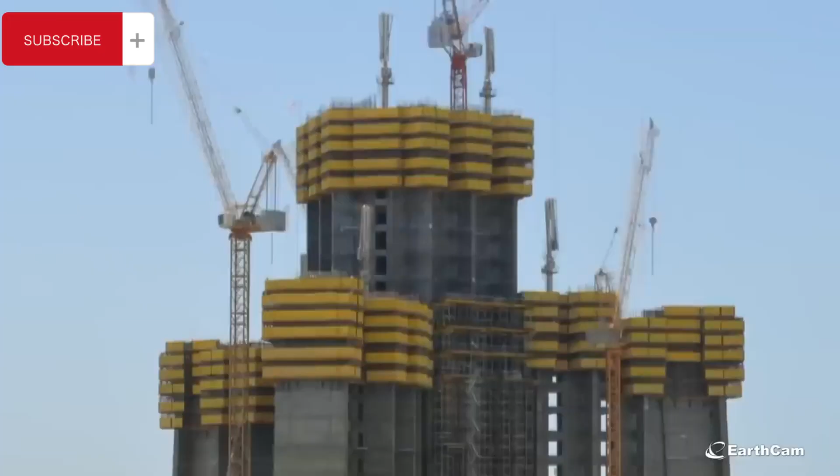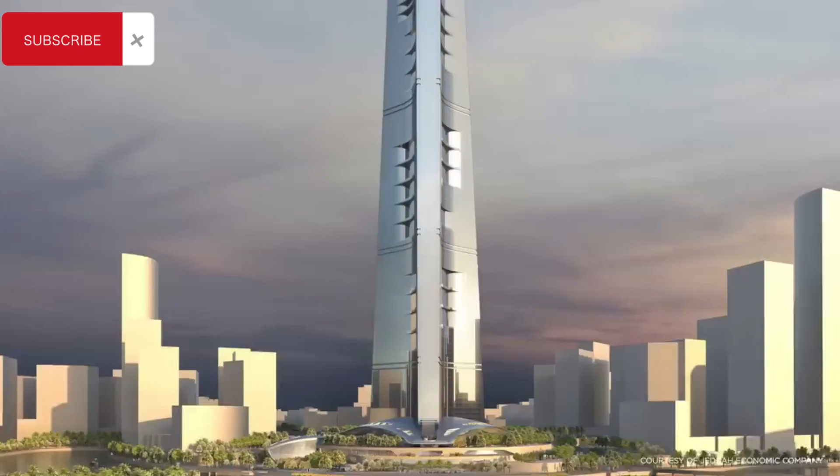Today the building stands unfinished and abandoned 300 metres in the air. And after years of political crackdowns and a global pandemic, it remains unclear if Jeddah Tower can ever rise to its full height. Even if construction works do start up again, it'll take a massive feat of engineering to complete. There are no building codes that prepare you for it, over a kilometre tall. This building had never been done. With over $1 billion, and to a large extent the country's reputation riding on this tower, all eyes are on Jeddah to see if it can ever complete the world's tallest building.

Now, like any skyscraper, the taller it is, the more attention it tends to get. Jeddah Tower, soon to be the tallest building in the world. Saudi Arabia is making a major push to diversify their economy.

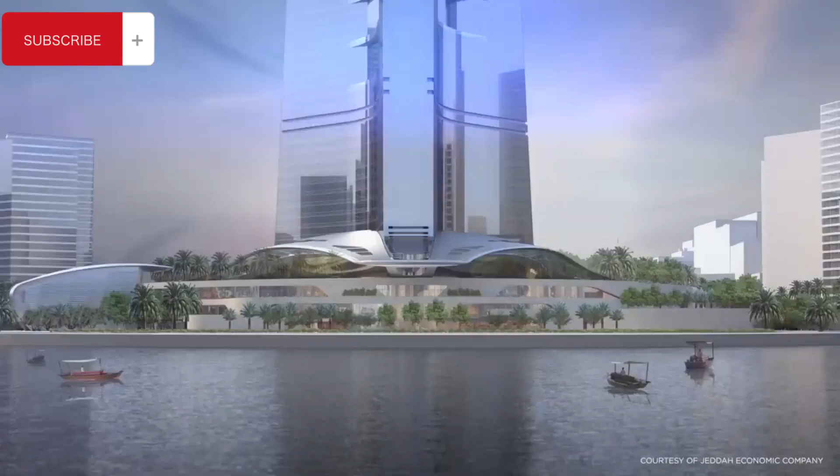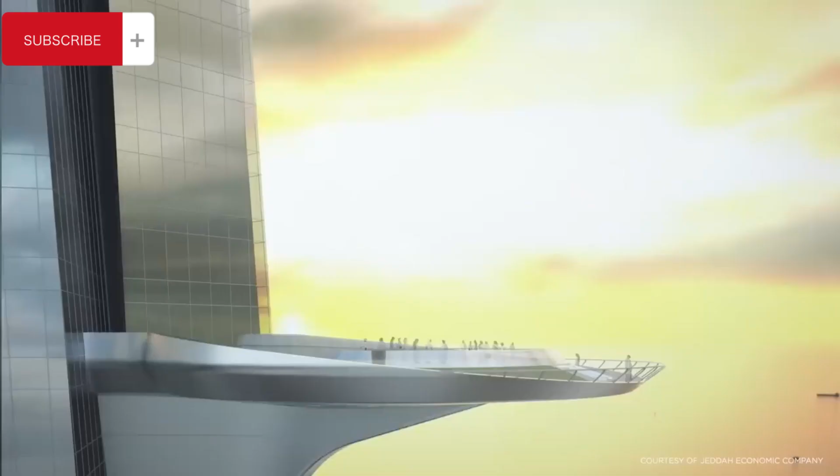Back in 2011, billionaire investor Al-Walid bin Talal had set his sights on creating a centrepiece for Jeddah Economic City. His bold plan for a skyscraper in, you guessed it, Jeddah, would feature 167 stories of homes, offices and hotels. At a kilometre tall, it would rise well above the 600-metre threshold for classification in the mega-tall skyscraper category, and would essentially try to make Jeddah the Dubai of Saudi Arabia.

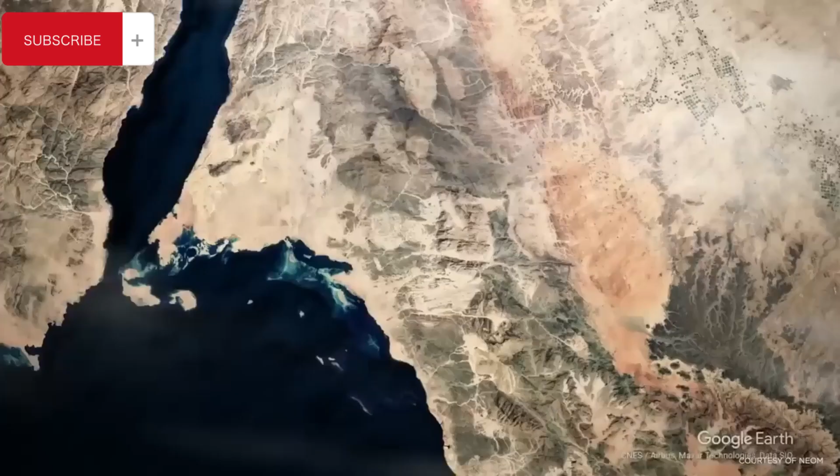It's important to draw a distinction between this and the other huge projects that Saudi Arabia has recently announced, particularly around NEOM. They're led by its Public Investment Fund, which is a state-driven sovereign wealth fund seeking to diversify the Saudi economy away from oil. Jeddah Tower is a private development, albeit one that started out with plenty of backing from many in the state.

Now, to build something a kilometre tall, you need an architect with a strong resume. Enter Adrian Smith. If his name sounds familiar to you, it's because he's the guy who designed the Burj Khalifa.

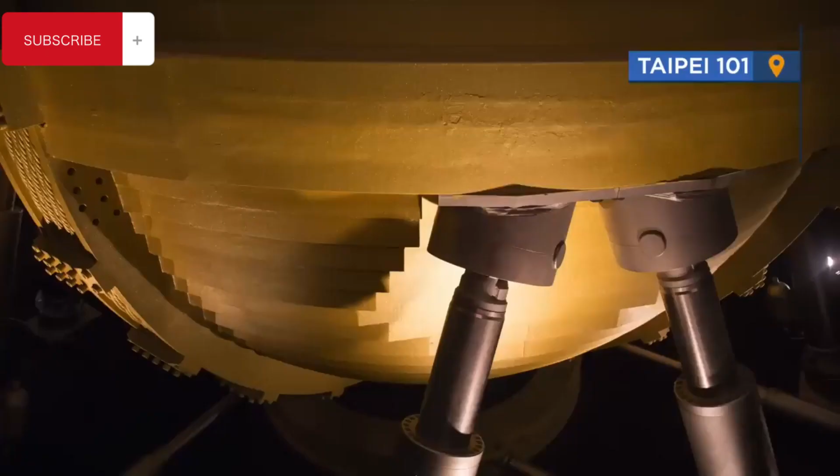One of the biggest challenges with creating skyscrapers this high is the extreme lateral wind loads they face. The taller a building is, the greater its tendency to want to sway towards its top, and that's something engineers must address to ensure safety and comfort. To reduce movement, some supertalls like Taipei 101 or 432 Park Avenue used massive weighted devices called tuned mass dampers near their summits that counteract swaying motion, but these can take up a lot of valuable floor space.

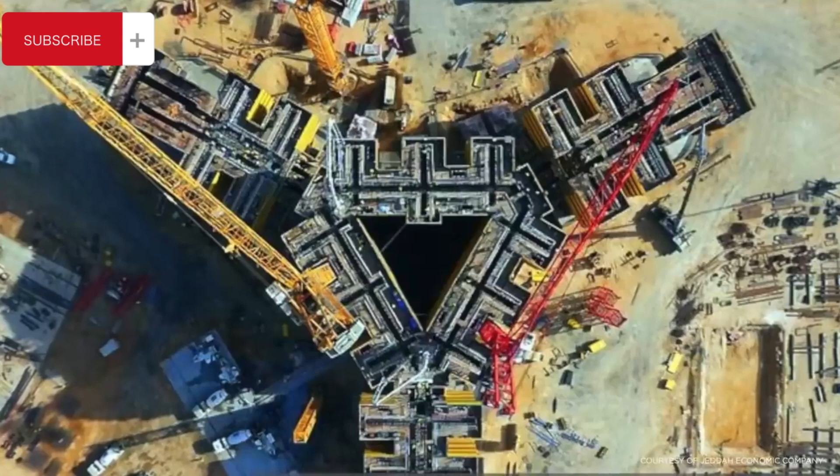For Jeddah Tower, Smith took another route, one that lies in the most fundamental part of the building design itself. Like the Burj Khalifa, the Jeddah Tower plans to use a buttressed core to reach its megatall height. Unlike most skyscrapers that have 4 external walls, this approach sees a hexagonal core reinforced with 3 Y-shaped walls. And that really does work.

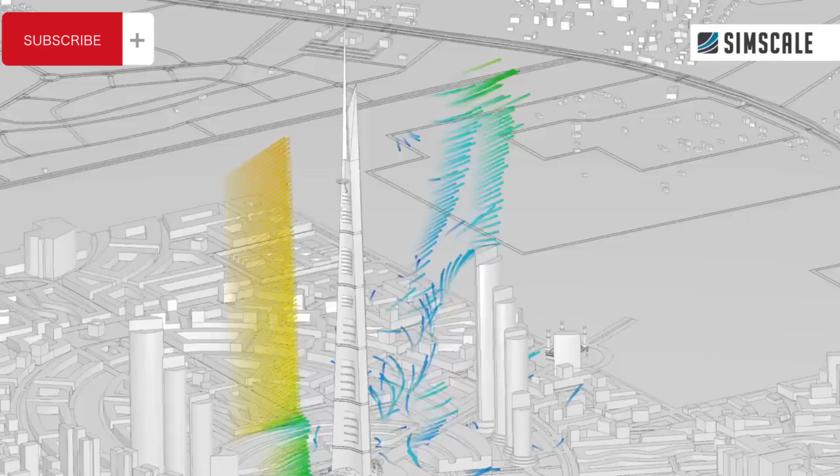We use software from today's video sponsor SimScale to model how wind forces could flow around the Jeddah Tower's enormous form. It's analogous to a 3-legged stool. John Setra wasn't involved in Jeddah Tower, but he certainly knows a thing or two about the design of extremely tall buildings. It's a very, very efficient system.

The triangle works in ways to deflect the forces from 2 sides. It doesn't necessarily have the same effect as, let's say, a square where there's a broad side on the square or a rectangle, and those forces are then deflected to the other three sides. The triangle actually acts as an automatic deflector.

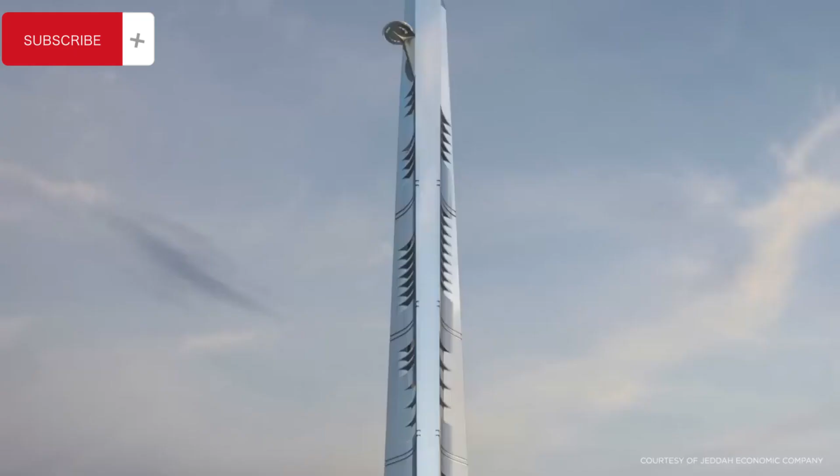The Jeddah Tower would also dramatically taper towards its peak, further reinforcing its resistance to strong winds and making it more aerodynamic than a four-walled straight-up profile. That really matters because winds get stronger the taller you go, and on this site, with a building of this height, there aren't any other buildings or structures around to break up the airflow.

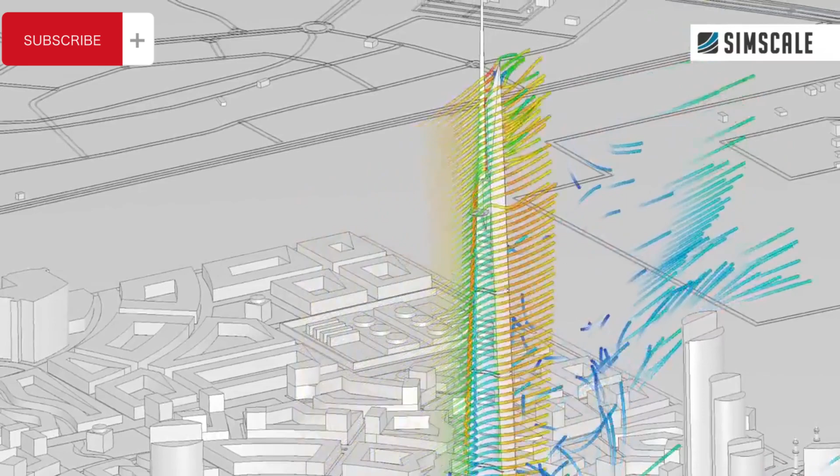On the 157th floor would be the tower's crowning feature, a jaw-dropping open-air observation deck that would easily become the highest viewing platform in the world.

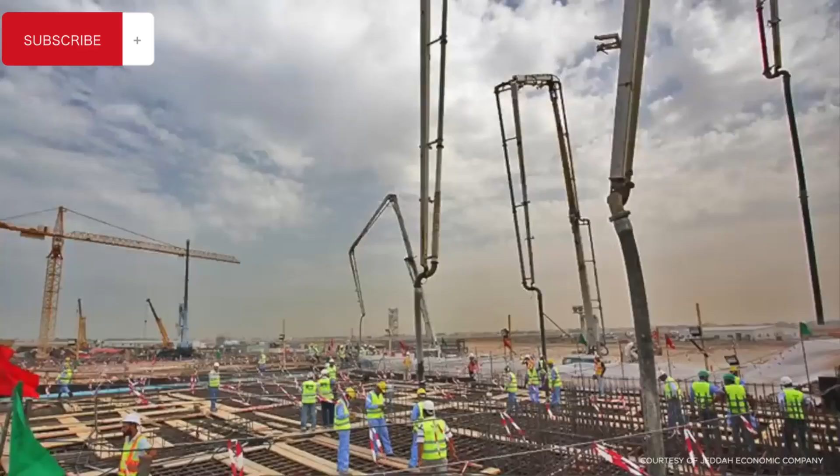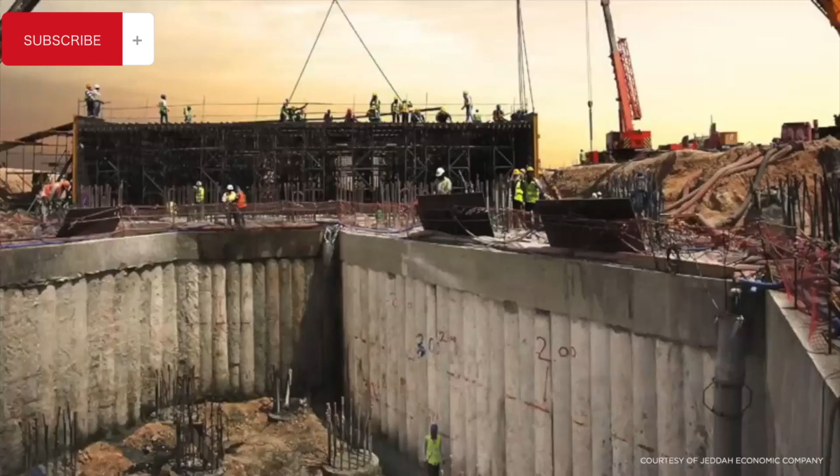With that design finalised, building works first began back in 2013. Now, as we all know, one of the first steps of construction is also the most important: foundations. And to support something this tall, engineers needed to use a lot of concrete.

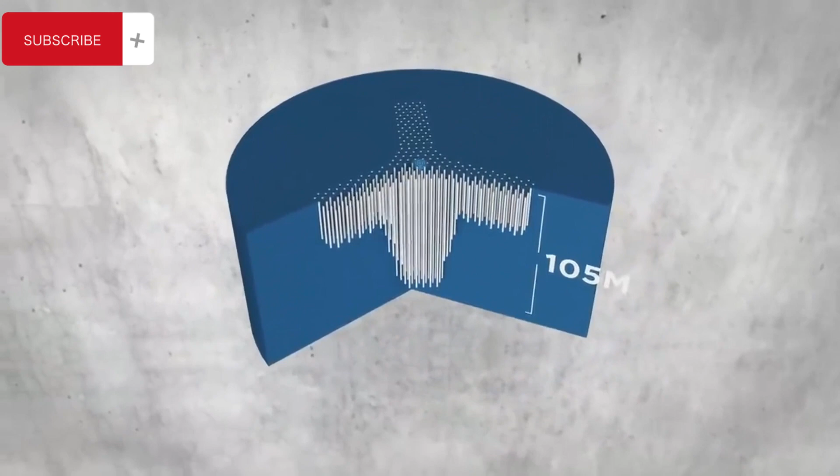First, 270 piles were drilled 105 metres into the ground. Then a giant 5-metre thick concrete slab was placed on top. That would become the base, distributing the weight of all 1,000 metres of skyscraper set to rise above it.

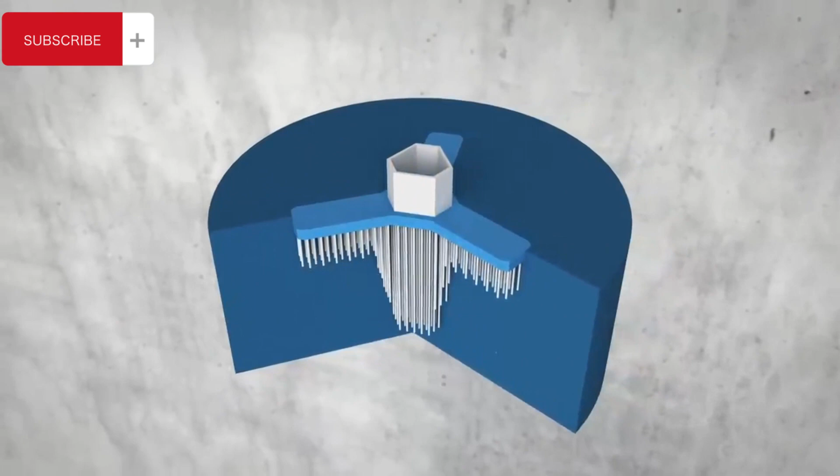Next, the core was constructed, allowing the tower to steadily rise around it. Concrete was poured using a jump form system. That's a type of climbing formwork that rises with the core structure, allowing builders to work safely and with considerable efficiency inside.

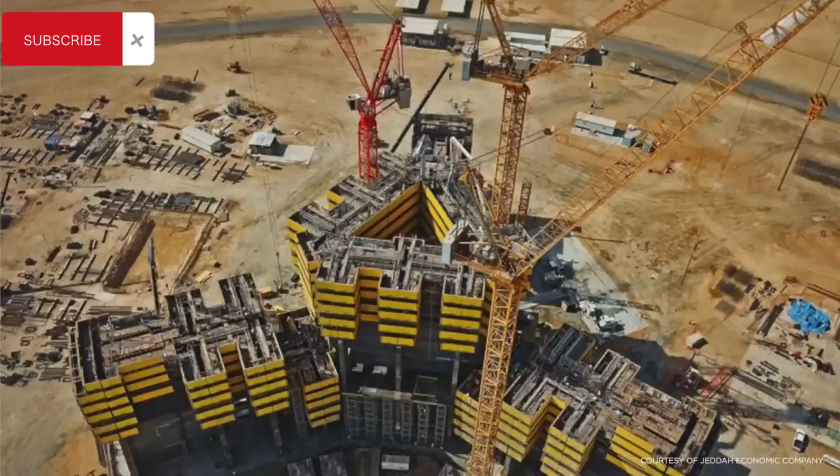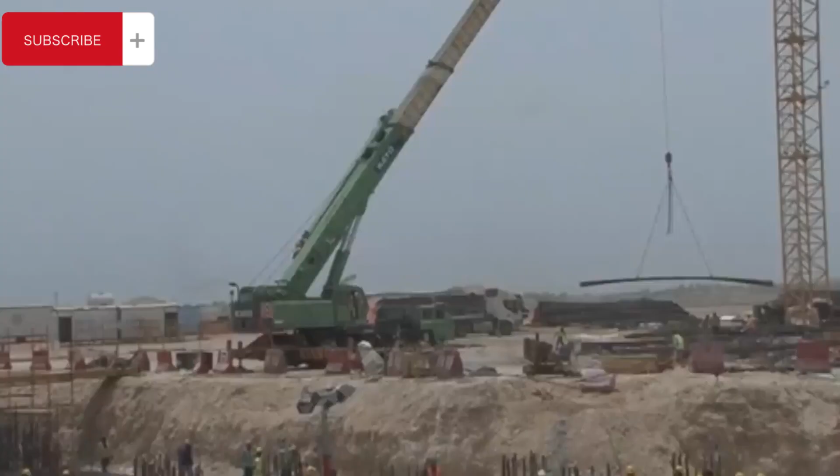In 2015, 2 years after construction began, the project secured $1.2 billion in funding from a Saudi bank and real estate venture. By 2017, Jeddah Tower had risen 63 stories above the desert, around a third of its final height. Despite some bumps in the road and minor delays, it looked as if the world would soon be getting its next tallest building.

Remarkable times in Saudi Arabia. 11 princes, 4 sitting ministers and dozens of former ministers have been arrested. Among those arrested is the billionaire Al-Walid bin Talal, one of Saudi Arabia's most known business tycoons.

Things took a turn when Mohammed bin Salman became Crown Prince of Saudi Arabia and began an anti-corruption purge. Two people caught up in the events included Jeddah Tower's key backers: businessman Prince Al-Walid and Bakr bin Laden, chairman of the tower's construction company, Bin Laden Group.

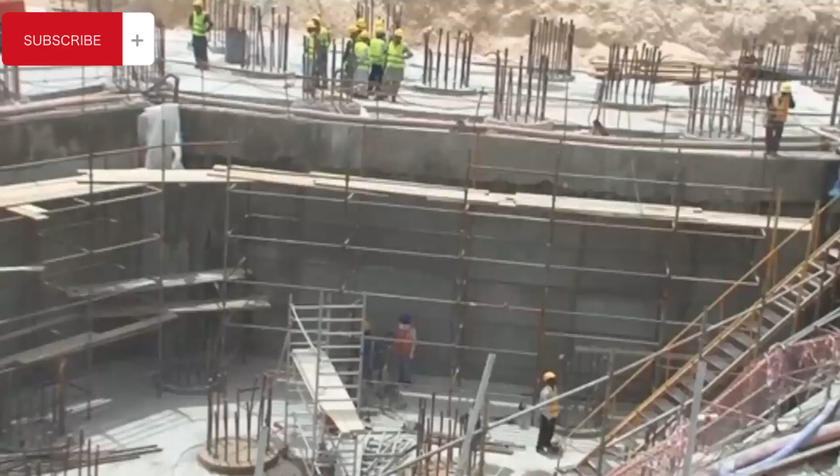That all caused work on Jeddah Tower to briefly stall. The project's backers were eventually released and work briefly restarted, but then there were labour issues with the contractor that further complicated matters, stalling it again.

Just as construction was about to restart in 2020, the pandemic hit and works halted. It appears that ever since then, the tower has sat empty and incomplete. Yet, take a look at the official website, and the homepage still says it's happening.

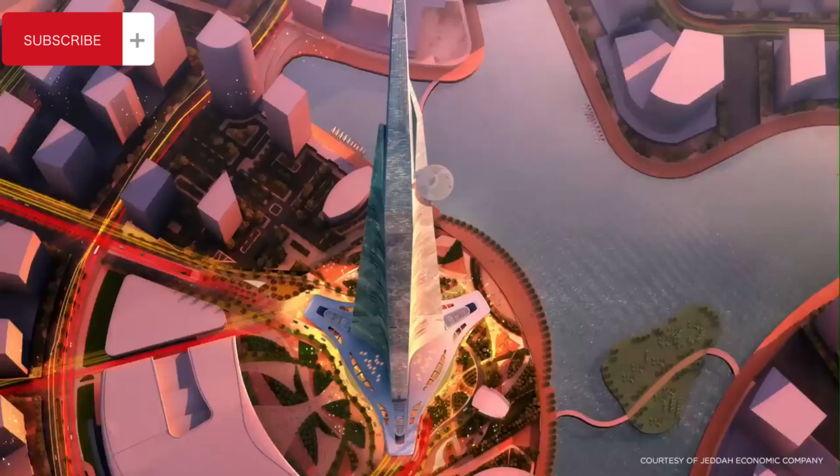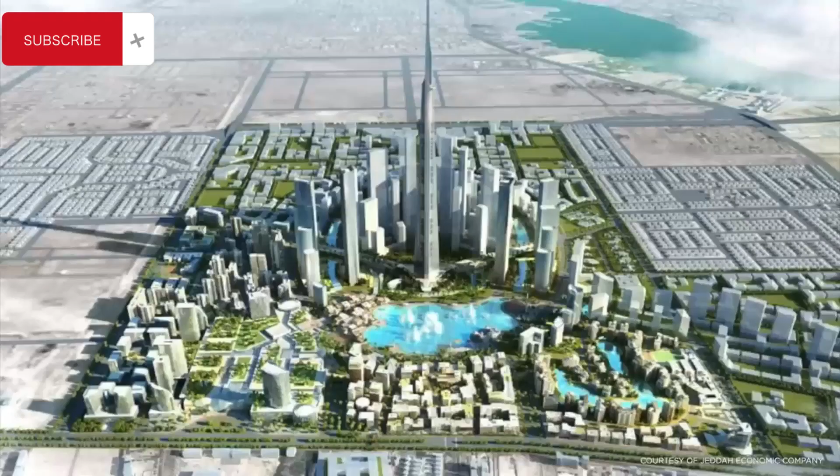Jeddah Tower was going to be a challenge for engineers on a good day. Throw in these considerable political and logistical issues, and it's perhaps little wonder that things have seemingly ground to a halt. So we've seen what it's supposed to look like, but even if everything restarted, is it actually possible to build this tall? Well, the truth is, we'll never know unless it's actually achieved in physical steel and concrete.

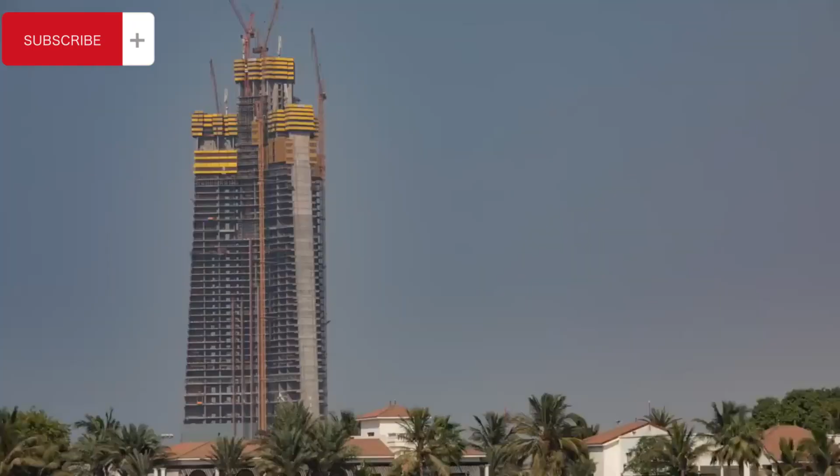What we can say is that engineers were pretty certain they could do it, and built the core to almost the same height as New York's Chrysler Building before things got stopped.

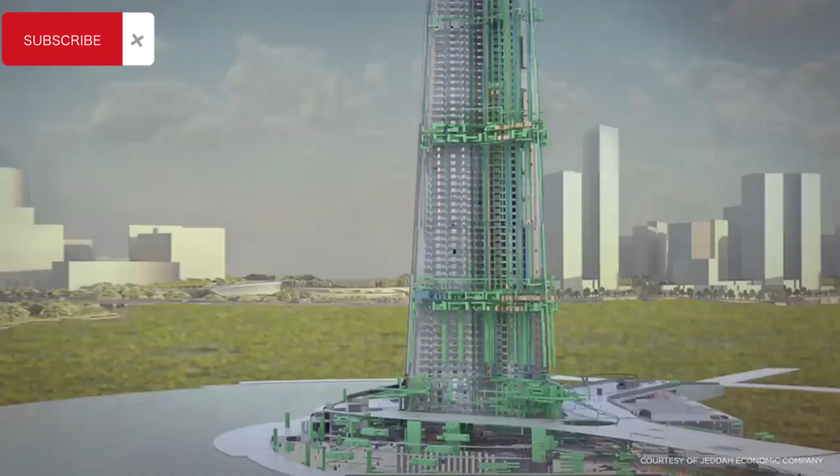They worked from the established principles paved out by other tall buildings, most notably the Burj Khalifa. They modelled, tested and simulated their designs in a wind tunnel and brought them to life in virtual software before even putting a spade in the ground or attempting to pour concrete above the clouds.

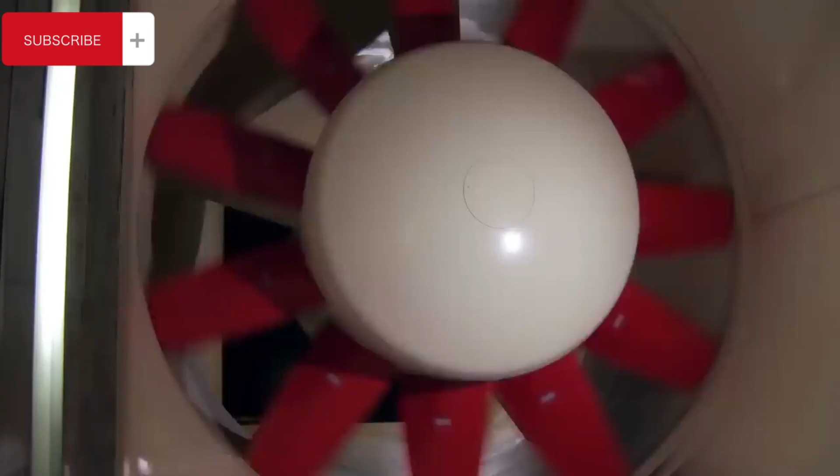The building's aerodynamic performance and ability to manage lateral wind loads was put to the test in a wind tunnel and then modelled in software similar to that produced by today's video sponsor, SimScale.

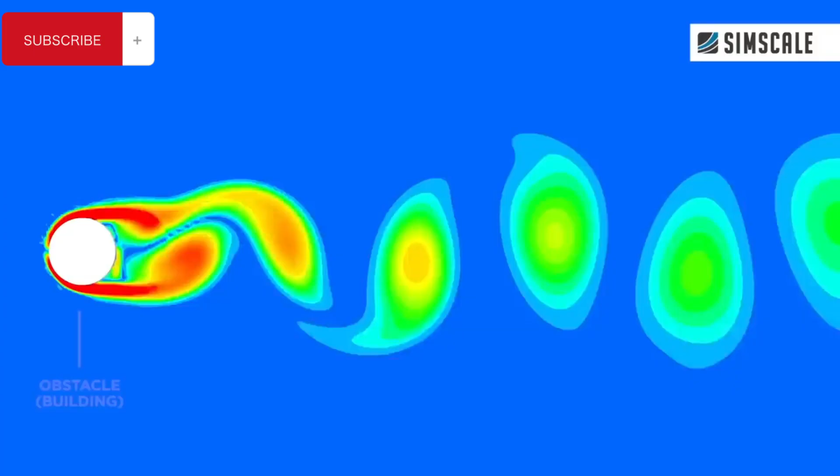All tall buildings have to manage wind loads, and as we said, it gets harder the higher you go. When strong winds move around structures, areas of lower speed air, also known as separation vortices, emerge on their opposite side, creating suction forces that pull at the buildings, putting them at risk of swaying back and forth. Tapering a building as it rises helps to break up the uniformity that causes this.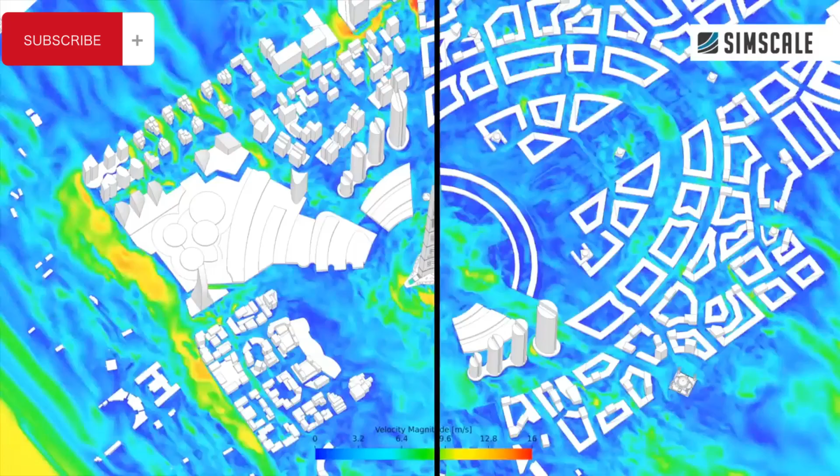We ran a model of Jeddah Tower through SimScale software to show you just how effectively this works. We also created a simulation showing how wind forces could influence the surrounding area at street level, both with and without the skyscraper.

You can see the completed tower would be likely to produce stronger gusts on the ground near the base, so designers will need to work to minimise that and protect pedestrians.

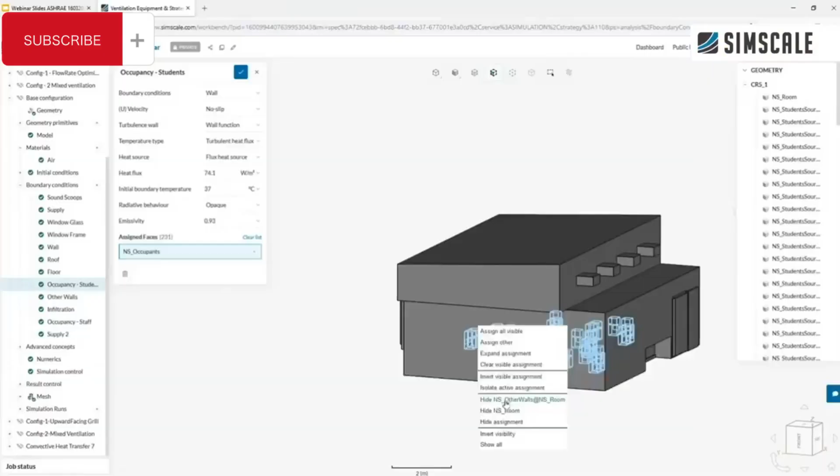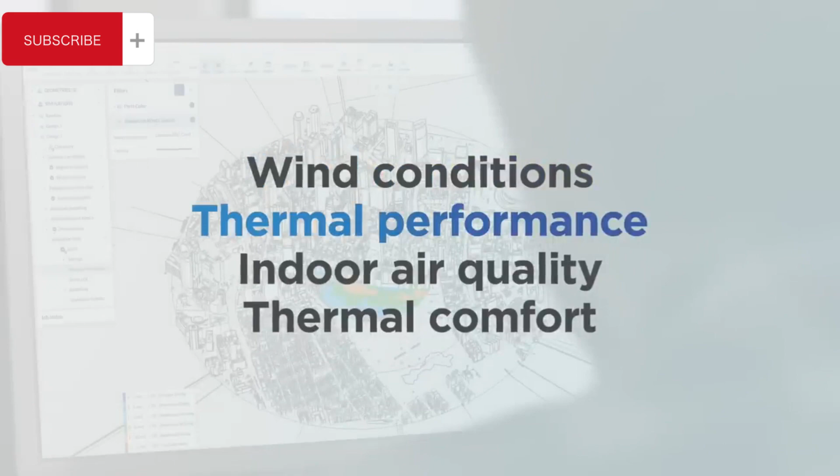SimScale is a powerful cloud-based engineering and simulation platform that enables everyone to create high-fidelity simulation models for building physics, urban design, and sustainability. You can model everything from wind conditions to thermal performance, indoor air quality, and thermal comfort. By running these virtual tests early in the design process, teams can solve problems before construction starts, saving time and money. And for Jeddah Tower, time is money the longer construction is stalled.

To take this concrete core in the desert and turn it into the full-height occupied building will mean running tests to understand the strength and rigidity of the existing structure before recommencing construction on top of it. The building's structural lifespan calculations are thrown off by part of it being 6 years older than the rest.

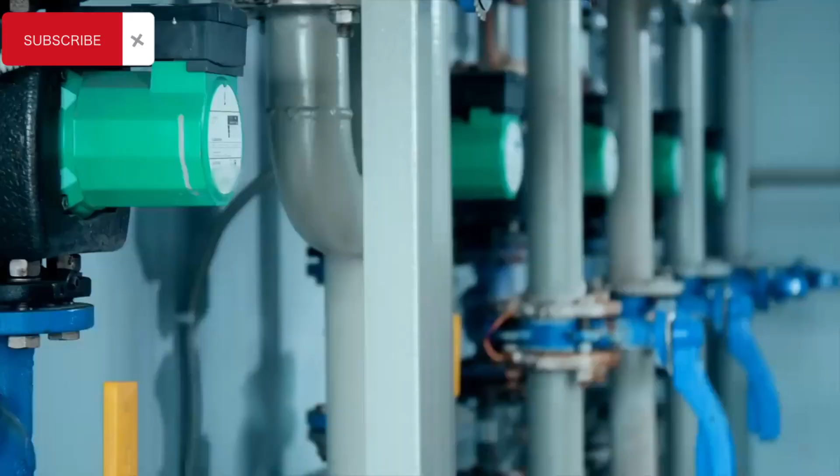Once the remainder of the structure goes up, an advanced cladding system needs to follow close behind. Mechanical systems that can withstand extreme conditions 1,000 metres in the sky then need to be designed and installed. And it'll need one of the tallest elevators ever built.

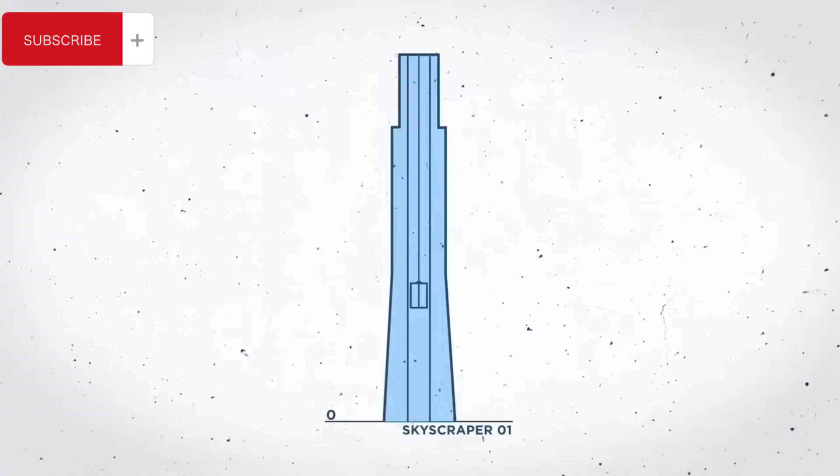Historically, skyscrapers this tall have required people to change elevators on the way up. That's because after a certain point, around 500 metres, the weight of the steel ropes used to lift them becomes too much. But innovations like UltraRope by KONE, that we mentioned in a recent video, replace those steel ropes with a carbon fibre material that's 7 times lighter and more durable.

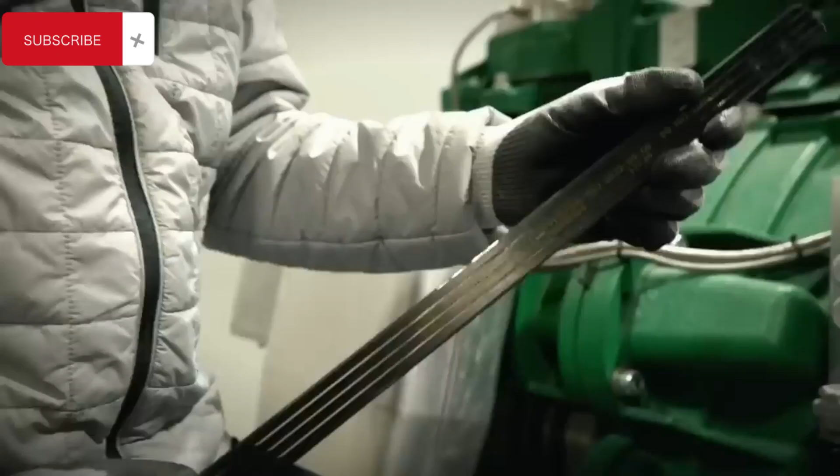It means an elevator can travel up to 1 kilometre into the sky, and the B1M understands that KONE's system is specified to be installed at the Jeddah Tower should the building proceed.

As you might be gathering, the whole extreme height thing really does make this project tricky. Despite that, some designers are turning it to their benefit.

At those upper elevations, you have actually higher intensity of solar. For example, the top of the building has a spire, which is the architectural spire. We had to build an environment where we could control the temperature, so the concrete is not expanding and contracting and in turn would crack.

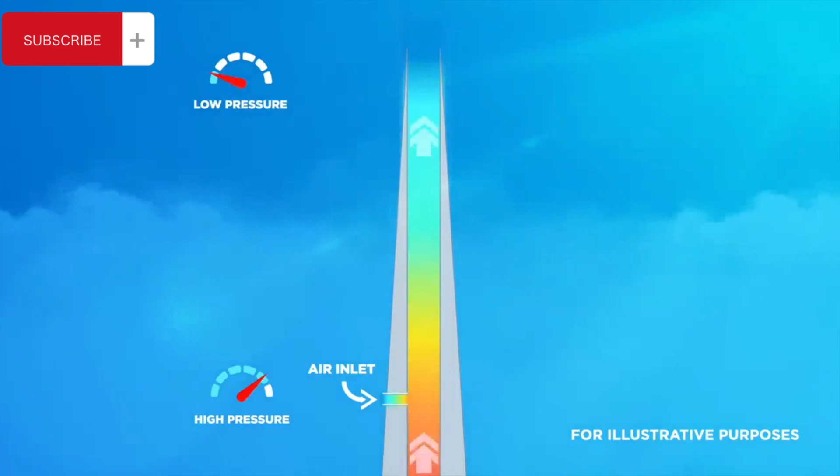We utilize the temperature variation to create a stack effect inside the spire to be able to ventilate it properly. So it doesn't really use any energy. It's self-ventilated, but it's very controlled.

But the Jeddah Tower's location in the desert brings more than just intense heat to the table and creates a huge maintenance requirement. The sandstorms are abrasive, so you can imagine that very fine sand swirling around the building, and you want to have very durable coatings on the building that will not literally be sanded away.

And that also then affects the cleanliness of the building. In the Middle East, they use many systems that don't require a human being to be on the scaffolding, and it's automatic.

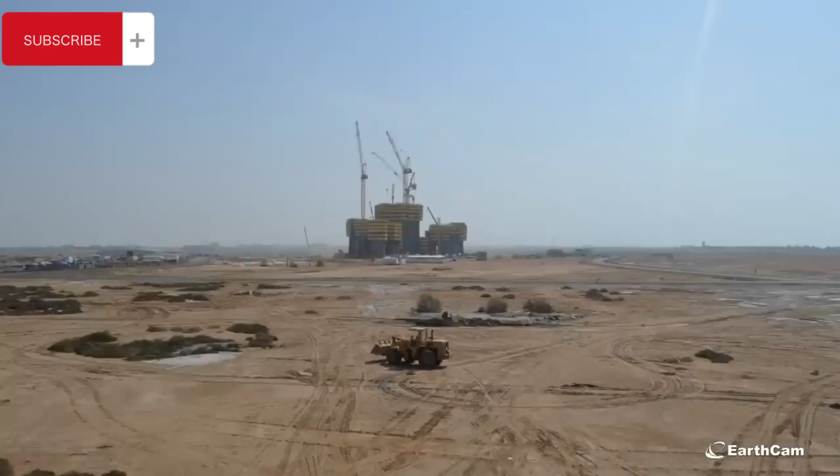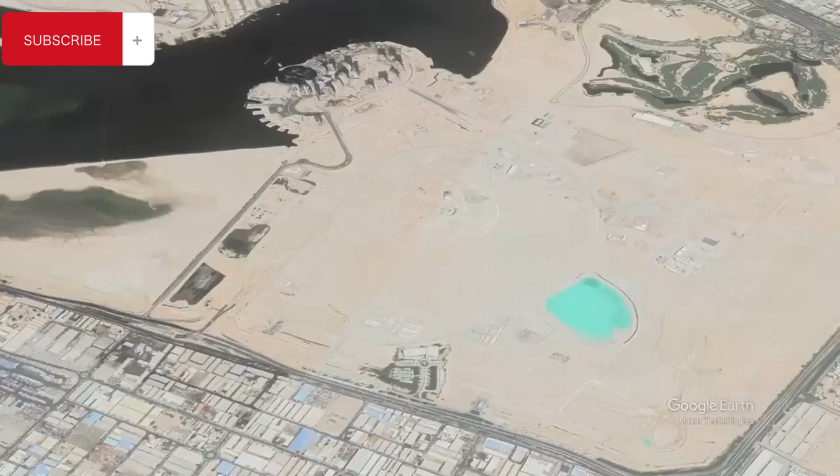Now, building something as bold as the world's tallest building will bring you headlines and some jealousy. You might recall plans for Dubai Creek Tower, a scheme announced by the UAE to bring the title of world's tallest structure back to the country, that started work and then paused again after Jeddah Tower hit the buffers. Its foundations remain sitting there, kind of like a quiet warning to Jeddah should it ever start up again.

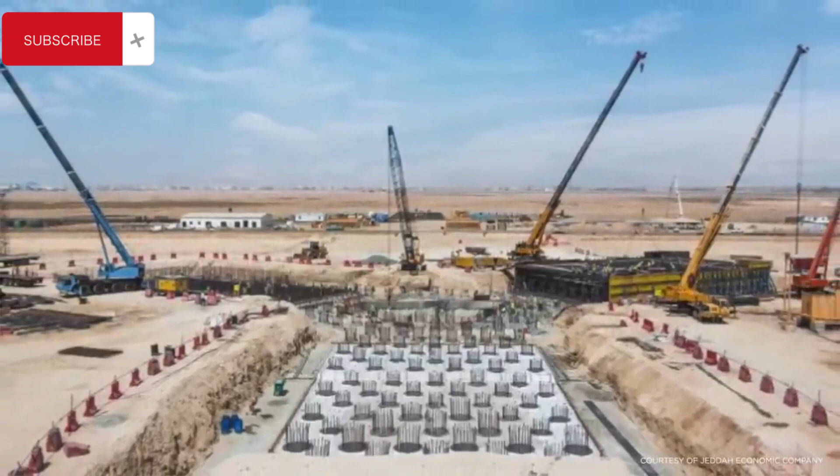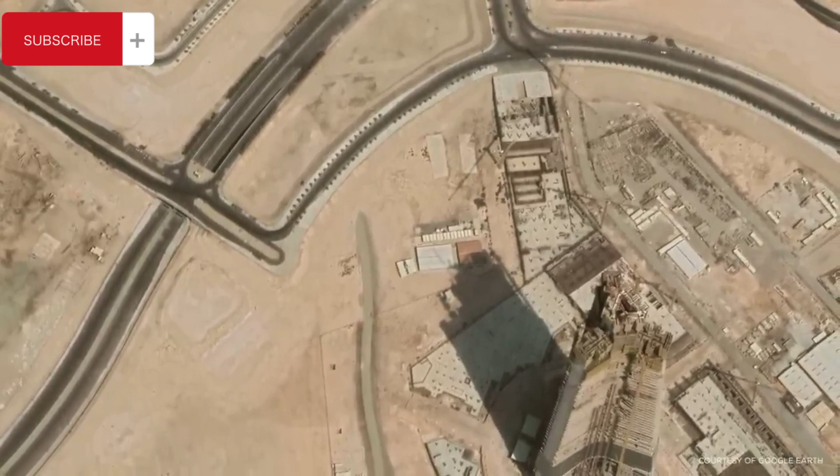Despite the long pause, Mehdi thinks things could start to move soon. There is a lot of talk right now and planning to restart. They have built the utilities and roadways at the site. Obviously, it's been stopped for a while, and there are things that need to be rethought for the process. So now I think we're in a much better position.

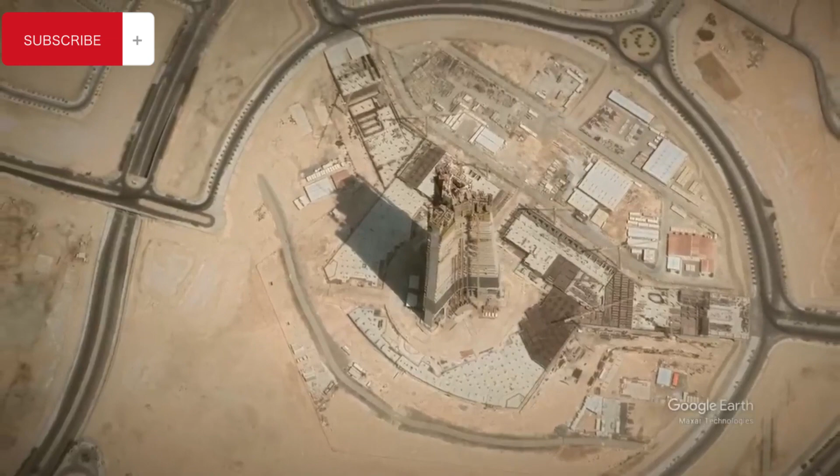While it may still be possible to turn this super tall stump into the world's tallest building, right now the challenges of funding, politics and extreme engineering all appear equally daunting, collectively putting a heavy block on progress. If the world's first kilometre-high skyscraper ever rises from these sands, it'll be both record-breaking and remarkable in many ways.